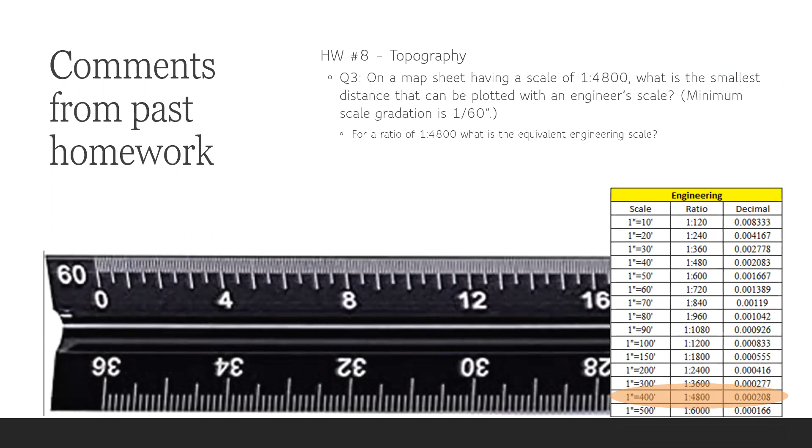Cool. So that's what we're looking for here, is get it into some units that we can figure out. If we're dealing with an engineer's scale, we're usually dealing with inches to feet, right? That's pretty standard for civil engineers. So if we're looking at this 0 to 6 mark, 6 would be right in here. Oops, there you go. So how many tick marks are there from that 0 to that 6 mark on this scale?

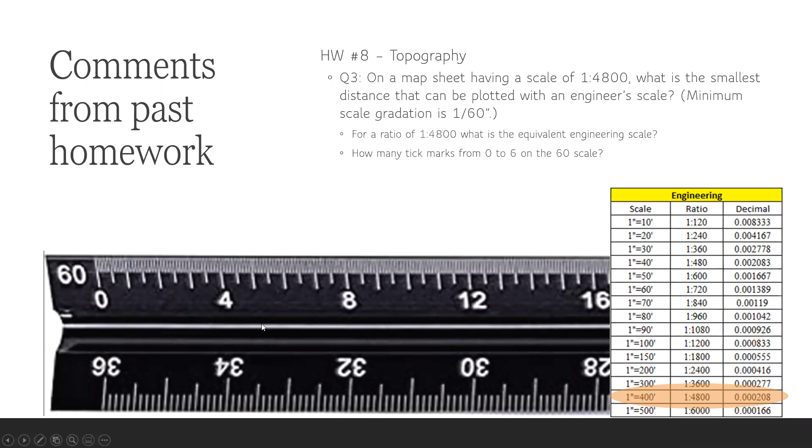We're going to come up to Victoria. From 0 to 6, how many of these little tick marks are there? How many is there between? I don't know. I have no idea. Okay. So it's broken up on the 60 scale. What it's saying is that for every inch, there's 60 tick marks. That's what we wanted to ferret out on this particular question, okay? So from 0 to 6, there's 60 of those little individual tick marks.

And Kenny, I know you've got the eyesight of a hawk, but we're just going to stick with the tick marks. It's not like reading the rod when we're out in the field, right, where you can interpolate between. We're sticking pretty close to, especially down to those 60ths. And I'm zoomed way in on that image, and it's still really hard to see. It's hard to get a good image of these scales.

If you don't have one yet, you're gonna need one, okay? We've gotten by this semester without it, but by the time you get to statics, graphics, any of the other classes, you're going to start living with this thing.

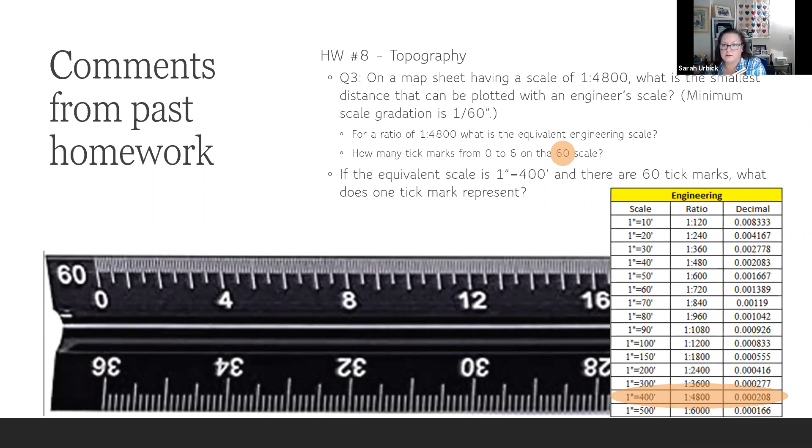Yes, Lucy, we see you. You're muted. Feet. Oh, okay. Thank you. All right. Let's see.

Tick marks. What does one tick mark represent? Okay. Would that be like 6 to the? Is it okay if I just say decimal for it? Yeah. Okay, so what I ended up doing was I said, okay, 1 inch equals 400 feet, and I ended up dividing that by 60 tick marks, 400 by 60, and I got 6.667 for each tick mark.

That's exactly correct. That's what we're looking for, is that this whole distance, regardless of whatever numbers are down below here, this whole distance is 400 feet, we're saying. So how far is it from here to here? What portion of that? Right. So that's the math we're looking for on that.

All right. So I got some varied answers on that. Some of the work shown didn't quite show the thought process. So I wanted to go over that and make sure we were all kind of on the same page.

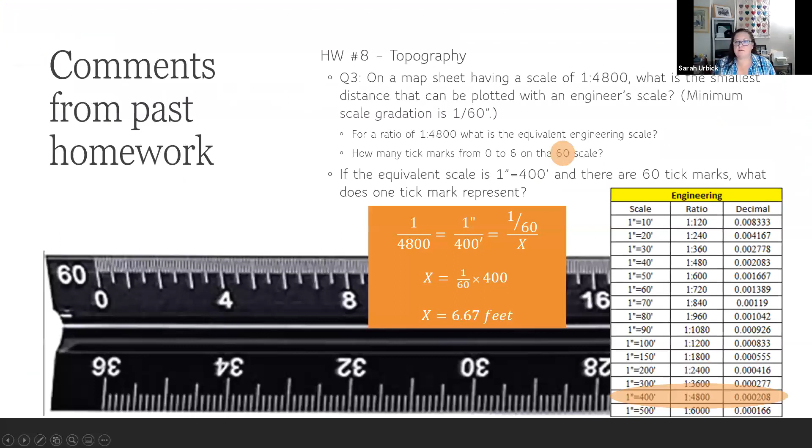Drawing contours. How many of you absolutely loved this and how many of you wanted to throw the paper across the room? Which, you know, unless you crumple it up and weigh it down with something, it doesn't do a whole hell of a lot. No comment.

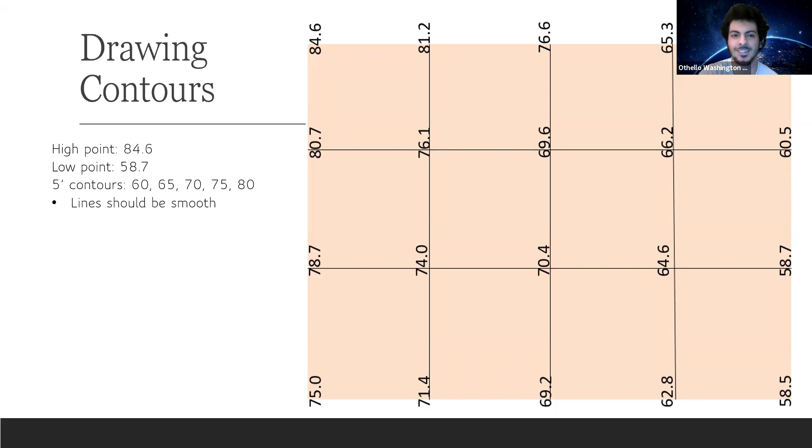So there's a reason I picked these specific problems to go over. This was one of the homework assignments, right? It was out of the back of the book and it said they were 50 by 50 squares and it gave the coordinates, it gave the elevations at each one of those points in kind of a table format. So what I did was I blew it up and put it to scale, basically. So over the course of this 50 feet here, our elevation changes by 3.4 feet, right? Same thing with all the rest of those locations.

And so the way to tackle this, probably the most conveniently, is to pick what's our highest point? What's our range? What are we dealing with? Highest point, 84.6. Our lowest point, we're down here at 58.5. Okay, so we know kind of the range that we need to be in. To simplify, instead of doing every foot or every 2 feet like we did on the homework, I'm going to do every 5 feet because we could be here for hours getting nitpicky, scaling off each one of those lines and figuring out how far to go to hit that whole number mark, to hit that contour line, right?

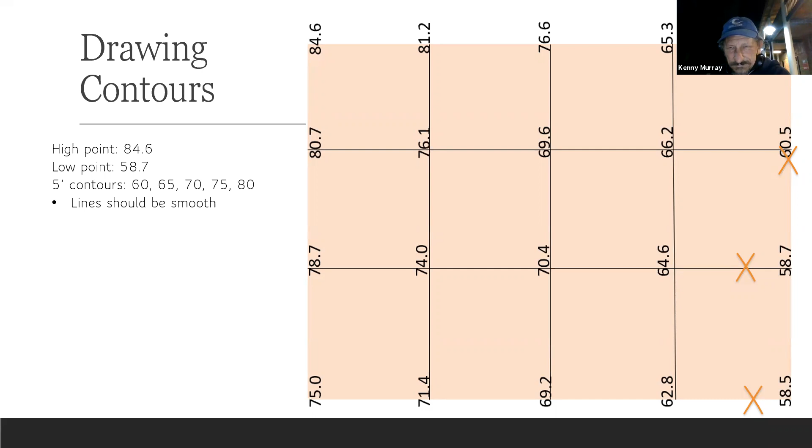Okay. So I think my next one was my 80s. Or not my 80s. Did I do 80? Yeah. Hang on one second. Let me make sure. I don't want to ruin the surprise. All right. Hide that for a minute. All right. So let's look at the 80s.

Who's up next? I have Miles on my list. Miles, can you pick one of those points and tell me where the 80 would fall along those lines? We could do between the 78.7 and 80.7. Okay. So we're about 1.3 from the 78.7. So 1.3 divided by the difference of that, which would be 2. It's like whatever that is. Let's see. So it's a nice even number.

We've got exactly 2 feet difference stretched over that 50-foot mark, right? Notice that that distance really doesn't come into play at all. We're just eyeballing it. It doesn't matter if it's 50 feet, 100 feet, 200 feet, right? We're just catching those elevations in order to do the topo map. So would you say it's halfway, 3/4 of the way, 1/4 of the way? 65% of the way there. 65%? Precisely, yeah.

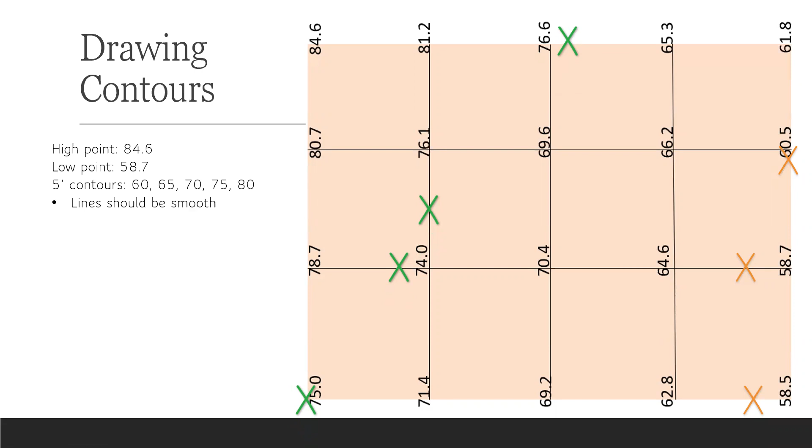Oh, sorry. I should have had you do 75. Oh, my bad, I misinterpreted. All right. So 75 is nice and easy. We'll just jump back a little bit. I have an exact corner that's given at 75.0. Going through, I can mark my X's somewhere between 74 and 76.1. That's pretty damn close to halfway, right? That's nice and easy.

Oops, I missed an X in here, right? So where I cross 75, somewhere between this 70 and this 76 would be back about here, but I forgot to put that X in. Is that going to make a big difference? Think about it for a little bit, okay? Mason, I'll come to you when we're ready for an answer on that one.

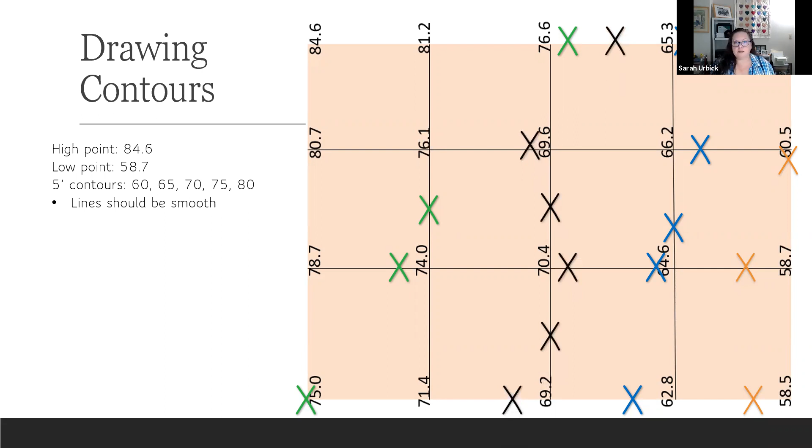There's my 80. I knew it would come in soon. All right. Now that we've done that, color coded it, looks great, kind of, sort of. Now what we want to do is we want to use nice, smooth lines, sketch it in, get it in there. And I know you guys just absolutely die every time I use my mouse to draw a line. You are going to be so proud of me. Look at that nice, smooth curve hitting all three of those points.

Since you guys are smiling and nodding. Yeah, see, I finally figured it out.

All right. So what we can do is we can come through, draw a line to hit all those different points. Now with the blue line, we can see that we're going to go a little to the right, and then we're going to come back to the left on our way down. Okay. The black lines, the black X's, something's going on there. Well, based on the way it's doing that, kind of that S curve, and the way the blue line's doing a little something different, maybe I am in trouble if I missed that point.

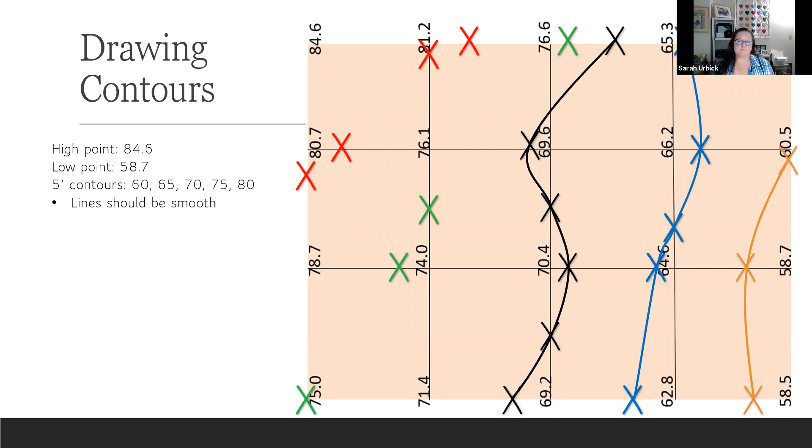Okay. So I'm going to keep hitting the space bar, and we're going to follow through. We're going to draw the black line. It gives us a little whoop-de-doo. Okay. Mason, what do you think is going to happen on that green line? I'll give you a hint. This time I caught my mistake before I graphed it. But if I didn't, what was going to happen? Wouldn't it just pretty much intersect with one of the black marks? Or is it just very straight? Very close. It's just straight. It would just be a straight line between those 2 points, right?

Yeah. So would that mean you missed a point then, maybe? Right here, yes. Oh, since it's 75. Yeah. If this is basically 70 and this is basically 76, then I need to be 4/5 of the way across, right? Yeah. No. 2/3. Yeah. So we'll go ahead and hit the space bar. So I went and caught it. So I did go through that point instead of making it a straight line. But that's something we've got to watch out for, because that would have given me a slightly different contour, right? I would have had a much steeper gradient here than I do, because my 70 contour line would have been closer to my 75 contour line.

And Marcine, I have you on my list. Did you want to answer a question? Sure. What's the question? So this one's kind of a softball. So if I had completely missed that point and I had a straight line from this X down here, what would that do to the distance here? And what would that mean? How would I interpret that? The distance between the green line and the black line would be much smaller, so that would tell you it's a lot steeper than it actually is. And there's also a point between 69.6 and 76.6. You'd also have to find another, although the next point is really close by, there's another point you would mark in there. Oh, yeah, there's a 70 and a 75 in there that I missed. Good catch. Okay, I'm not calling on you anymore.

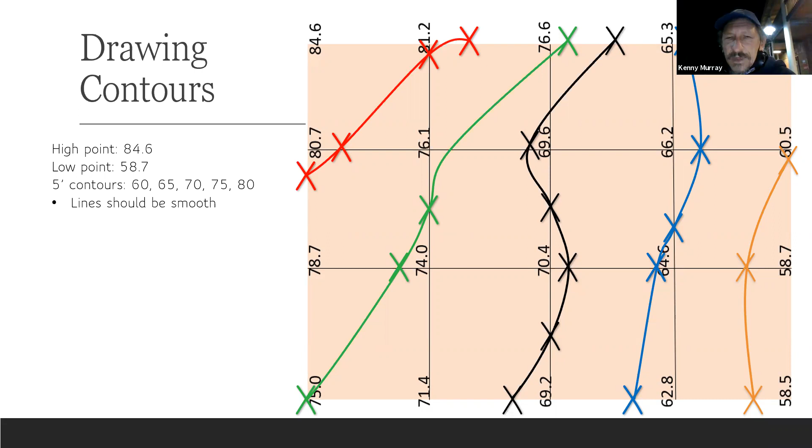So, excellent point. You know, we missed those points. Is it the end of the world? No. Do I want to go back and fix that? Yes, because I have a little bit of OCD and neuroses. So we'll proceed for the time being, and we have the same line going through our 80 elevation. Okay. Yeah, jump in there so I can talk. If you needed more resolution, is it okay to go ahead and do diagonals as well? Like between the 69.6 and the 81.2. Yeah, okay. If you absolutely want to, yes, totally.

There are computer programs that do this for us now. So very rarely do we end up doing this by hand. But if you remember back to third grade, was it third grade or fifth grade? When did we do long division? And you had to go through and do it by hand, and you had to draw out the little symbol, and you had to carry the one and then carry it down, right? And you had the remainder and all of that fun stuff. And you kept doing this by hand, and you're like, why the hell am I doing this by hand? Can I use a calculator? Well, yeah, but you had to understand why we're doing it. What's the process? How do I know if I'm getting the right answer, if I'm close?

Sorry, I have dogs that are about to have conniptions over these treats. Here, you can have that one. Oh, sorry. Hang on, sorry.

Worse than children fighting over toys.

So yes, you can get very, very detailed. You can get very, very precise. What we're looking for on these kinds of problems for the purposes of this class are eyeballing it, sketching it in, figuring out what shape do we have? What are we looking for, right? Is it a hill? Is it a cliff? Is it a pond?

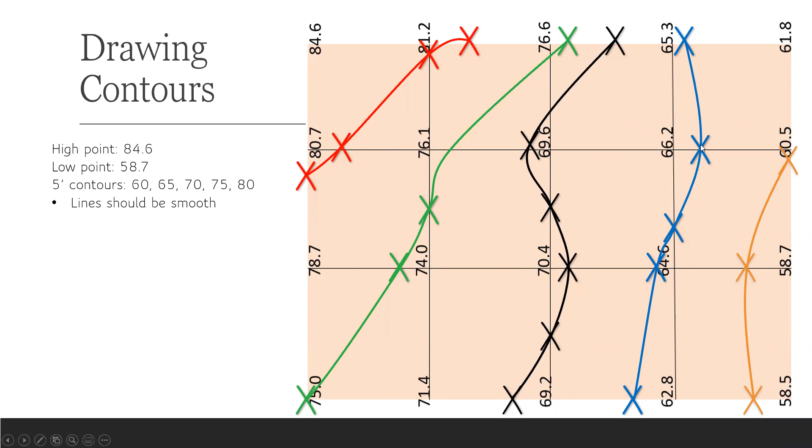I think I got it. Sorry, never mind. We are doing the 5-foot lines, not the 1-foot lines. That's why. Yeah, sorry. Excellent question. You're looking at that going, something's off, how do I interpret this? And that's the whole point behind this exercise: what am I looking at? What is this telling me? How do I interpret the readings here?

So what we do have is, you know, there's 50 feet here. So let's say that's about 10 feet from the blue X to the point where it's 66.2. And we know we've got another 50 feet to get to here at 69.6. Say we have another 10 feet to get to our 70 point mark. So 50 plus 10 plus 10 gives us 70 feet horizontal. What's my vertical change in elevation between those two X's?

Anybody? I thought you were waving for a second. Between the blue and black is 5 feet. Thank you, Kenny. Yes, it's 5 feet. So you're going 70 feet distance to drop 5 feet.

May not seem like much, may seem like a whole lot. All we have is this square that we're looking at. We don't have the whole countryside that we're analyzing. We just have this one little square that's 200 feet by 150 feet. Not even a football field, right? But we're saying that in that span, we're dropping 5 feet.

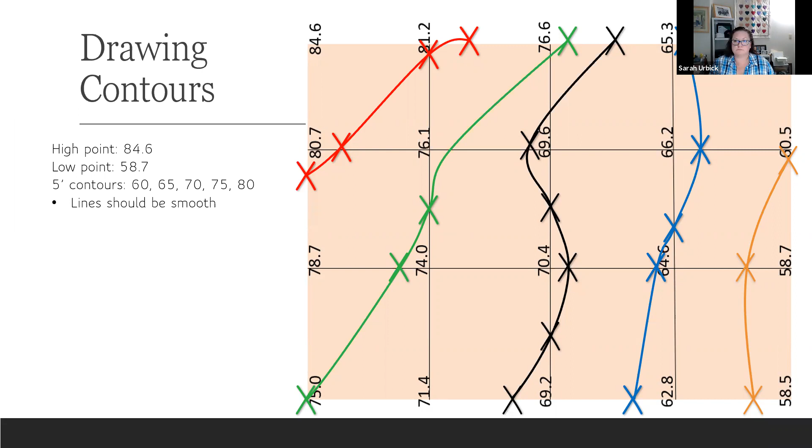Okay. See, oh, fun, earthwork and, oh, whoops, I missed something here. Earthwork and volumes. I mentioned it before, I'll say it again. We're going to talk about it a lot more. Keep track of your units, right?

Mason, this kind of circles back to, okay, you made that assumption. You told me you went from square inches to inches. And I'm like, whoa, wait a second, how? That's what I'm seeing a lot on the homework is the units of measure were, I don't want to say we're sloppy about it. We're cavalier about putting the units of measure when we're doing the math.

But now when we're getting to horizontal and vertical curves especially where we are dealing with a percent slope per station, those are weird ass units of measurements, right? So that sounds weird. What's even harder is the imperial units of measure, inches to feet to yards, just on the linear side, right? Then converting squares, converting area measurements, converting cubic measurements. How do you get from one to the other to the other? So keeping track of those factors really will help make sense out of the homework problems, out of the assignments.

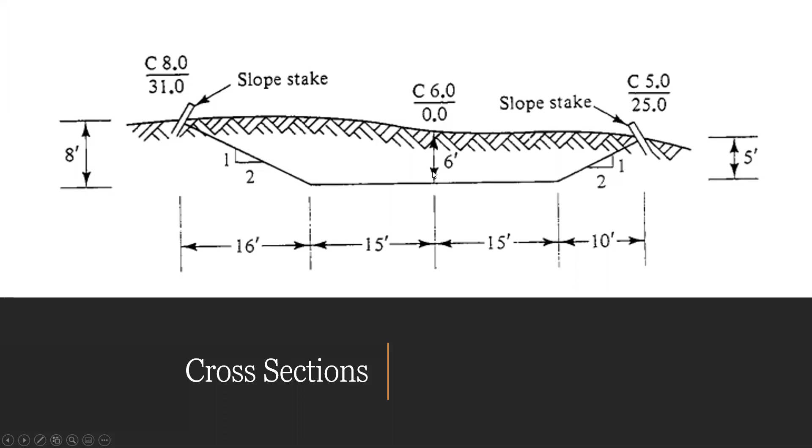This would be a negative 31. So since I was already calling on Neo, Mason, I'm going to circle back to you. Why is it a negative 31? Because it's left of the center line. Bingo, yes. Okay, so thinking of it as a coordinate system, our center line and the bottom of our excavation, that's our 0, 0 point. Everything is then measured off of that. To the left is going to be negative, to the right is going to be positive.

Cuts we consider positive, fills we consider negatives. So we keep in mind whether we're dealing with a cut or a fill. The double area method, you've got to come back around and close that traverse. Okay. So I've got, I think, 3 questions on this one. Anio, you're up. What are my side slopes? The ratio is 2 to 1 on the right side and the left side. Absolutely, yes. So it doesn't matter which direction it's going, it's still a 2 to 1 slope. Direction doesn't matter a whole hell of a lot there. Yes, 2 to 1 because it's over 2 horizontally for every 1 increment we go up vertically.

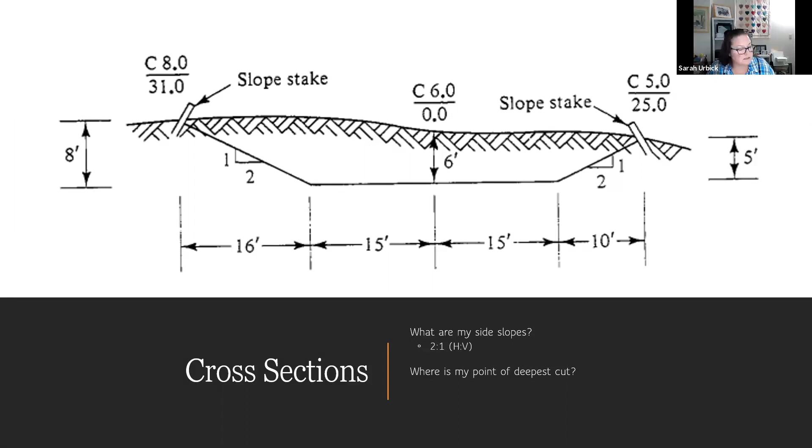All right. Atzine. Hope I'm not butchering names. I'm really sorry. What is my point of deepest cut? Point of deepest cut, wouldn't it be 0, -6? What's that? 0, -6. Well, right, this is my 0, 0 point. Oh, that's 0, 0 point. So it would be 0, -15. Okay. Yes, that point right there. Okay.

How wide is my road base? This brings us back to Viri. Is it the 8 feet? No. 6 feet? I can't do a straight line with my mouse. I'm trying. What we're looking for is how wide is the base section? So how far left and how far right do we go off of that center line? Everything's going to get measured off that center line. Yeah, go ahead. Is it just 30 then? Yep. Or 15? Yeah. 30 feet. That's it.

Any questions on reading the cross sections? Same thing as the topos. What is it telling us? What story are we learning from that picture? A picture's worth 1,000 words. Now we know why, because there's a lot of stuff going on there. I don't know if I could use 1,000 words for it, but you know, there's still a lot going on, right? Any questions on the cross sections?

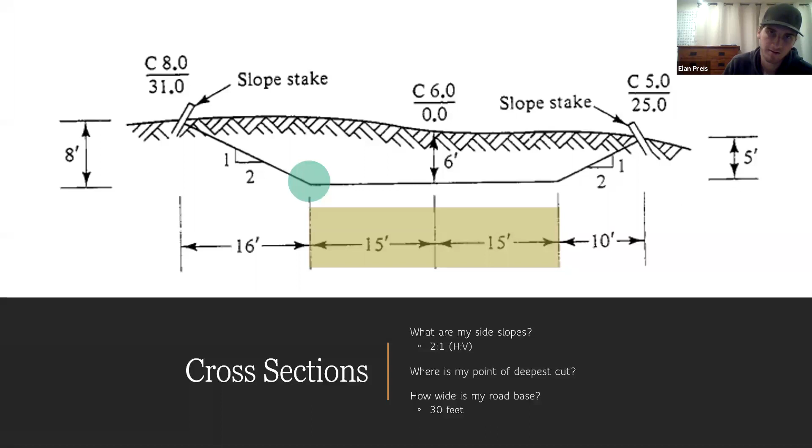Yeah, so the point of deepest cut, would that be like 0 over 15? Over -15. That's how you would write it. Yep. Cool. So the nice thing is by setting that coordinate system at our center line and the base of our cut at 0, 0, a lot of those cross multipliers drop out. All that multiplied by 0 goes away. So it's kind of a nice thing there. Makes the math a little bit cleaner.

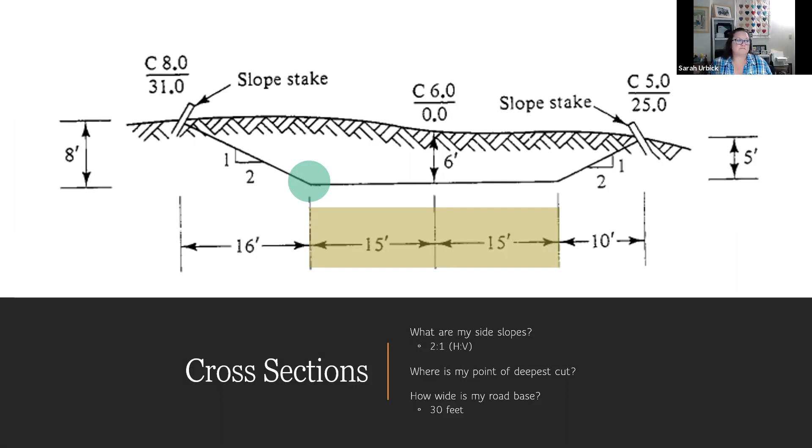Horizontal curves, more fun stuff. I know everybody absolutely loved this the other day. Were there any specific questions on this? Everybody seemed to do really well on the homework. So if there was anything that you guys wanted to go over, any of the problems that you wanted me to walk through the solution on, more than happy to do that. But the horizontal curves, it looked like everybody was pretty comfortable with, fairly. Okay.

Who was I talking to? Sorry, I don't quite remember.

Talking about the interior angles and what we do when we're breaking it up into those segments, right? Whether we're doing the arc method or the chord method. If we're looking at the arc method, it means the arc of that curve is 100 feet long. If we're looking at the chord method, that horizontal line is 100 feet long.

So if you ever get a chord, using the chord method or the arc method, either way, if you ever get a chord greater than 100, you know you've got a problem. So that's one quick little gut check, even off by a little bit. What that tells you is if you end up with something like a chord using the arc method, a chord length of 100.01, that tells me it's rounding. We just need to carry out the numbers a little bit further.

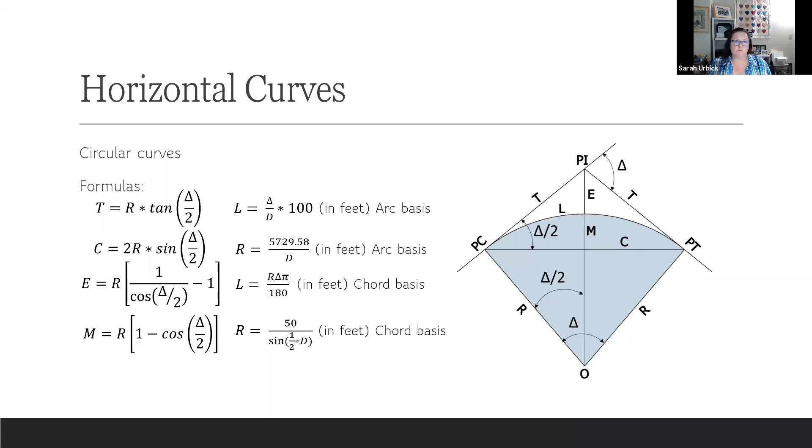Did anybody have any questions on these problems? Again, everybody seemed to be doing pretty well on it, the homeworks that I did look at already. So if you want me to go through any of the homework problems, we can absolutely do that. Just let me know which one you want to talk about. But I will keep going here.

Vertical curves. So vertical curves kind of, I screwed up. Let me just start out with that. I loved that some of the people that I talked to over the course of the week pointed out some mistakes that I had, some errors that I had, right? I just went along, I did the math, made mistakes. If you show your work, you can go back and figure out where those mistakes occurred and then catch up and fix it. So I did upload the revisions to question 1 and question 2. I have not replaced them in the overall solutions just yet. Eventually I'll make that one complete document, but right now it's 2 different documents. Questions 1 and 2, you'll see that I made revisions to them.

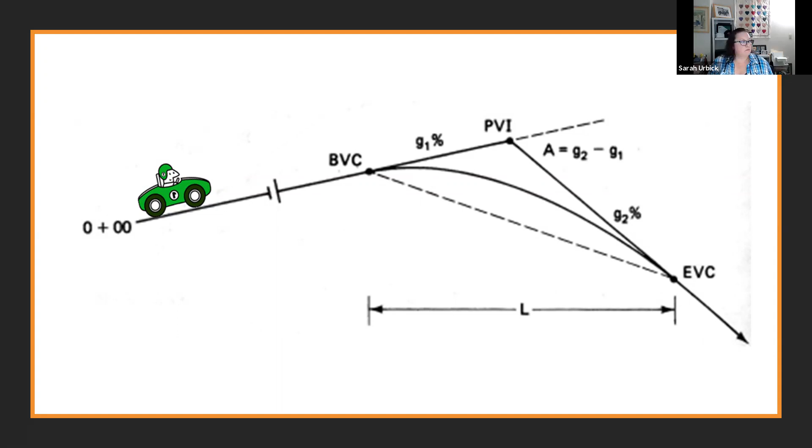We have our little race car. So we're coming back to this example problem that we went over last week. Remember, we're dealing with a parabolic curve. So we have a square of the distance. It's the slope times the distance to figure out how fast we're changing, right?

Just like with units of measure that I mentioned earlier, watch out for how the slope is presented, whether it's horizontal to vertical as a ratio, or whether it's a percentage, which then gives you vertical to horizontal. Still here on vertical curves, watch your units of measure. This is where they get weird. Percent slope, stationing. So it might be reported in stations, it might be reported in hundreds of feet, and it might be reported by numbers of stations. So in this example here, the number of stations is 6. L is the number of stations that we're looking at, so we would use 6 for L.

And watch the signs. Signs for your slopes and the value for R. Those do come into play. You can't just drop them, you can't just get rid of them, can't just ignore them. I've tried. You've seen what happens. Mistakes get made. Always start from the beginning of your vertical curve. So your PVC, point of vertical curve, your BVC, beginning of vertical curve. That's the hard part with this particular subject: which nomenclature are we using?

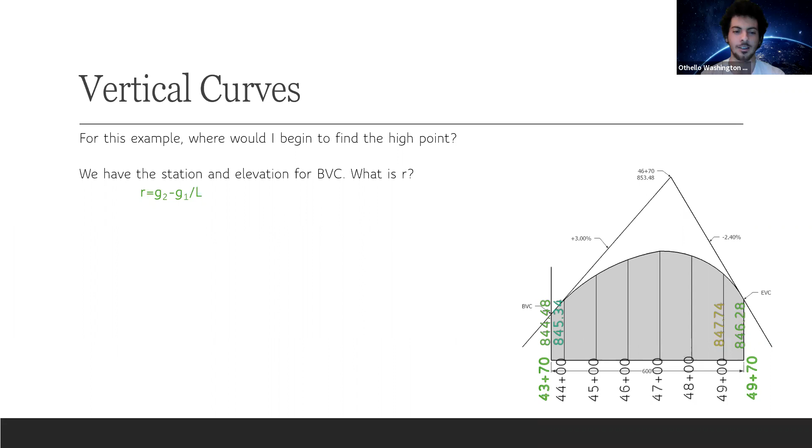This is where it comes in, right? That will make a big difference in what our value for R is, our rate of change of slope, of curvature. All right. And you gave us G1. You said that was 3%, but that's a positive. So what's our L? Let's go to Olga.

The L is the length of the horizontal part, which is between station 43 and 49, plus 70 on the right and plus 70 on the left. So what's the overall? 1 second. 1, 2, 3, 4, 5. 500, 600 feet. Right? Absolutely. So L is going to be 6 because we're looking at number of stations.

All right. So we have our negative 2.4, subtracting our positive 3%, dividing by 6. So our rate of change per horizontal distance is negative 0.9%. So for every foot we go, it's not that we're dropping 0.9%, it's just that our curve slope is coming down. We're getting flatter and flatter, right? So that's what that is telling us. That negative number means we have a negative slope, but it's based on every increment we go to the right.

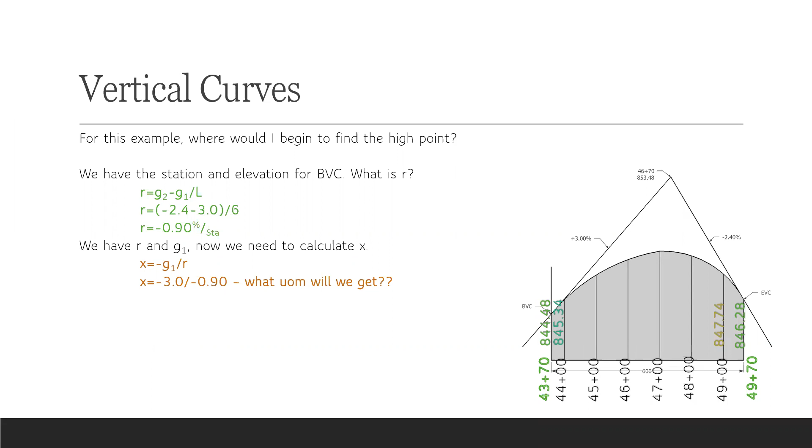I'm not sure for the unit of measure. Is the final unit stations? It is. Oh, okay. It is. And that's the thing with vertical curves, is you end up with these funky units of measure, but you got to make sure you're carrying them through, because if you did treat it as a number of feet, we're going to end up with the wrong answer. We need to look at it as a number of stations. So the unit of measure really does become pretty critical. We've got to keep track of what it is we're adding and subtracting. Okay. Yes, 3.33 stations from the beginning of our vertical curve.

She's out of breath from chewing on that stick so hard. She's 12 pounds. It was as big as she was.

All right. So now we know how far that point is. We know where it's located. What station is that going to be? Kenny, where are you now? You can shout. 47. Close. Tell me how you'd come up with the number and we'll figure out what that number needs to be. Well, if it's 3.3 stations from the beginning, that looks like about a third of the station between 43+70 and 44. And then I just go 3 more stations, which would be 45, 46, and 47.

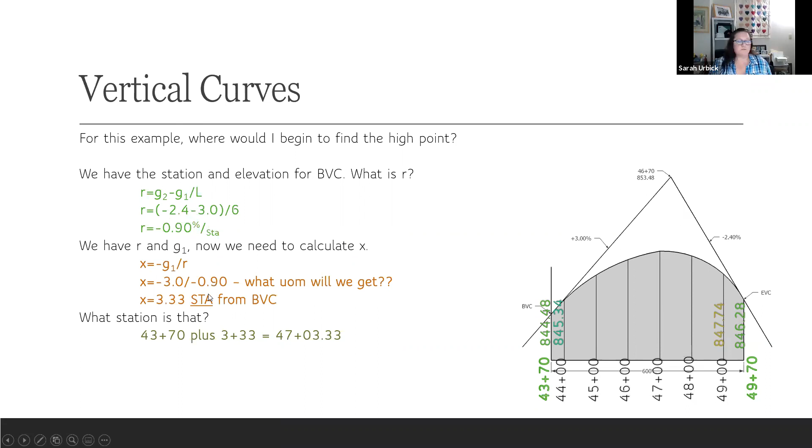So yes, that's what we're looking for, is we're adding those 2 together. You can also drop the plus signs, right? You can say it's 3.33 stations plus 43.7 stations. You can convert that to feet. Just make sure you're consistent with your units of measure. When you're doing the calculations, make sure you're presenting them the same way for that calculation. So here we end up with a calculation for the number of stations as a decimal. Here we're using station nomenclature.

We could also convert that straight to feet. 4,370 plus 333 feet, and do the math that way. How you do the math isn't as important as consistency in what you're adding together, right? What variables you're using. So our elevation at that point, John, how would we get started there?

We'd use the parabola equation. Exactly. Okay. I had to convert to a decimal because I was running out of superscript and subscript. So 0.5, it's 1/2 r x squared plus g1x plus the elevation at the beginning of our vertical curve. Last week, we already calculated what all that was. We figured all those points out.

When you plug into this equation, don't forget, if your r is a negative value, you need to carry that negative along. If G1 is a negative value because you have a sag, you have to carry that sign along, okay? Plug those values in. Come up with 849.48 feet in elevation.

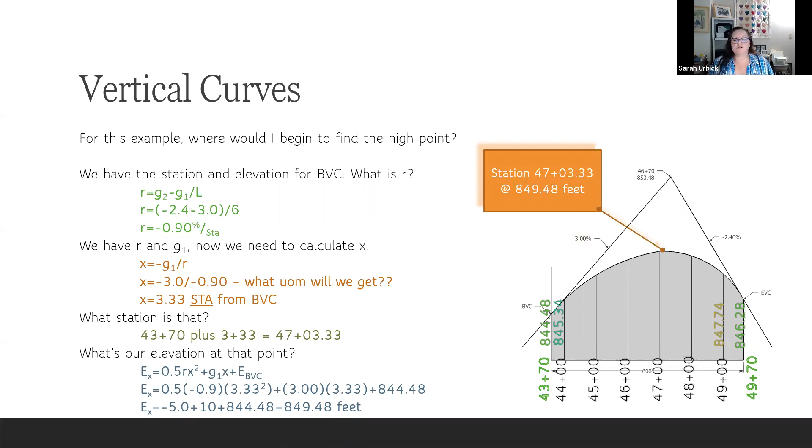Okay, you ready for the fun stuff? Yay. All right, so that's what we're looking for there. What's the station and what's the elevation? Where's our high point? Okay. Did that help clear up anything on vertical curves?

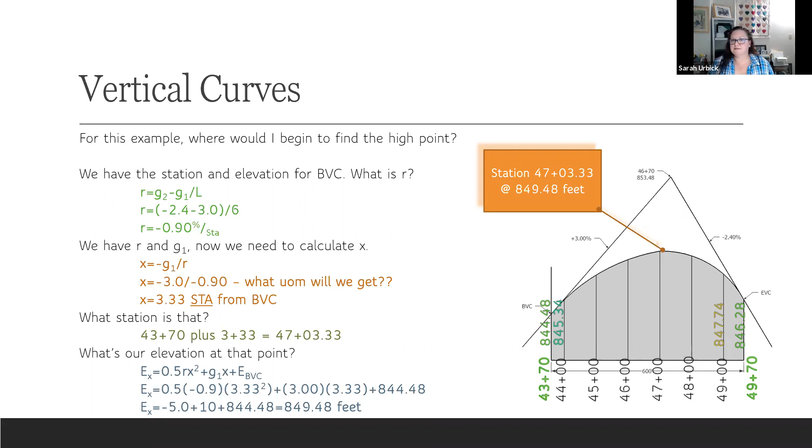Still clear as mud? Maybe the window's just a little smeary? I mean, we're not talking crystal ball. Don't expect it to be. Okay. Yeah, to which one, Mason?

Okay, anybody have any questions? Anything you want me to go over? Anything you want to repeat? So I think I had a question for horizontal curves. Okay. There's a certain question in the homework, I don't remember, but it's over getting the BVC through the slope. At least that's how I did it, or the beginning point, because sometimes I have a hard time finding the starting point. That took me forever, but what's the process for that? Because I know I did my own process for it.

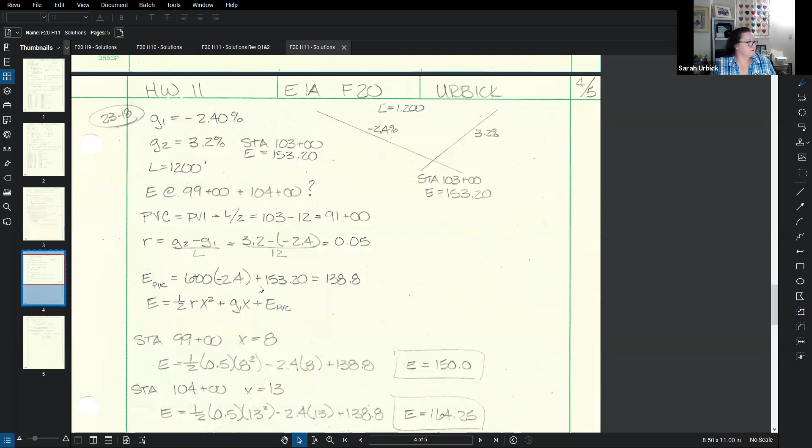No, it wasn't horizontal curves, it was vertical curves, and just finding the BVC and starting from there. Yeah. I didn't like that one. And unfortunately, it is a very valid question. Very possible when we're talking design and engineering. But yeah, it's a messy one. It's tough. Let's see. No. Yes. Everybody remember chapter 23, problem 21?

Yeah, and so I did a totally different way. I did how the textbook did it. I wanted to see if you had done it the way with substituting for L, and I tried that. And I got as far as, well, I had everything set up. Maybe I didn't get the PVI right. That might have been one where I was tripping up over myself, and then everything else didn't work out because of that. So that little concept right there, that was kind of tricky.

So that one we know because we were given the two stations. We know what the PVI is, it's at station 67. We know what the station is we're trying to make sure we pass through at that elevation, it's 68. So we know that we can plug it into that formula and use that to solve for other variables, right? So that's how we're able to say that the PVI is L over 2.

We're saying it's equal tangents. So by having it L over 2 plus 1, that's the X at station 68. Because we don't know what the BVC is just yet. We're trying to solve for all of those factors. Does that make sense? Yeah, for the most part, it does. And then the elevation of the BVC is really interesting, where you have the M and L over 2. How did the M come into play with that?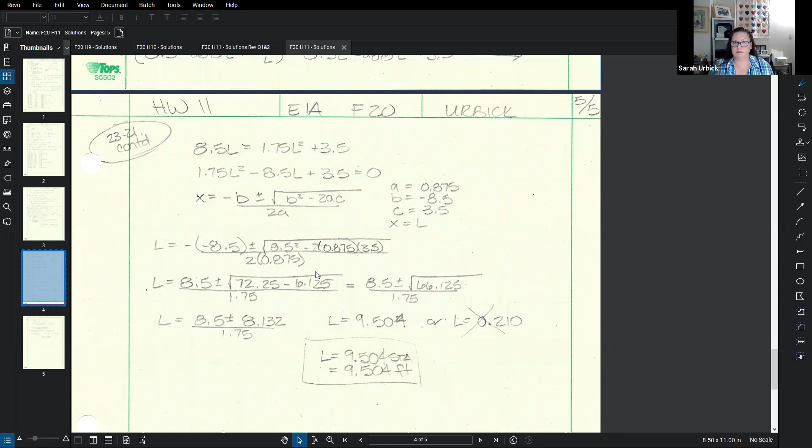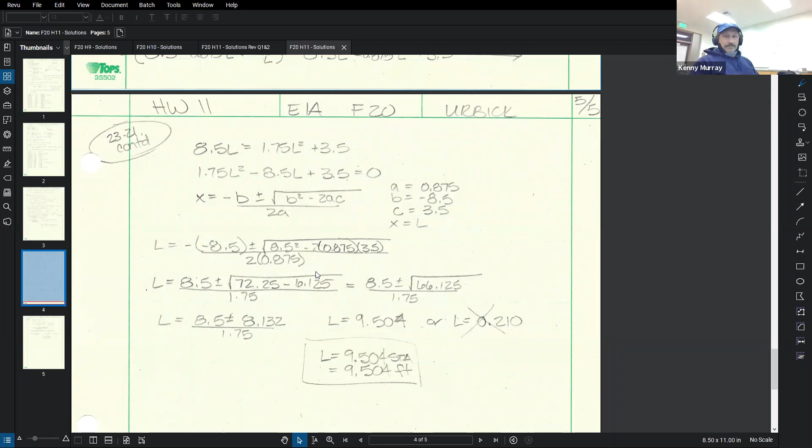Okay, I'm gonna try. We are gonna have a change of plans. Exam 3, and I know I pushed and pushed and pushed so that we would have exam 3, which gave us next week to review for the final exam. Everybody I've spoken to, Joanne included, said you did vertical curves and horizontal curves in one session. We crammed a lot of information into that one class. Those are the 2 biggest sections of the semester.

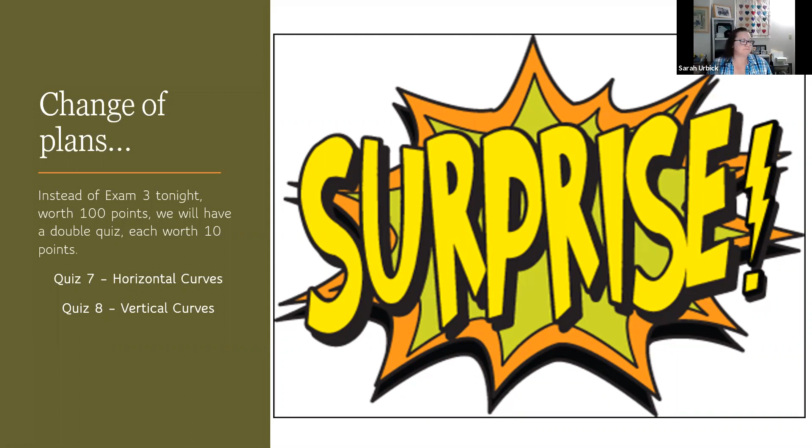Gives you a little practice, gives you that jumping off point. It's 2 quizzes in one evening. Each one will be worth 10 points separately. They're going to be graded on their own, even though I've set it up as 2 questions in one quiz. There we go. So the details. So tonight, 2 quizzes, 10 points each. Marcine has agreed to host study sessions to get ready for the exam. Any questions you have about anything coming into the final exam, okay?

There are some conditions. This is extra credit. Attendance is not mandatory, but it is extra credit. My authoritarian comment on that is I have asked Marcine to put together a sign-up sheet. If you sign up, you must attend. If you do not sign up, no harm, no foul. If nobody signs up, she's not hosting the session. So don't hold back thinking somebody else is going to be there and you can just piggyback on that. If you're going to gamble, you better put your own money on the table.

So you will receive five exam points. We'll add that to whatever your lowest exam grade was to get that bumped up a little bit. So you're going to get points for the exam by attending a study session. If you sign up, you are committed. If you are a no-show, you will lose 5 points. Marcine has her own finals to study for. She doesn't need you screwing around. Okay.